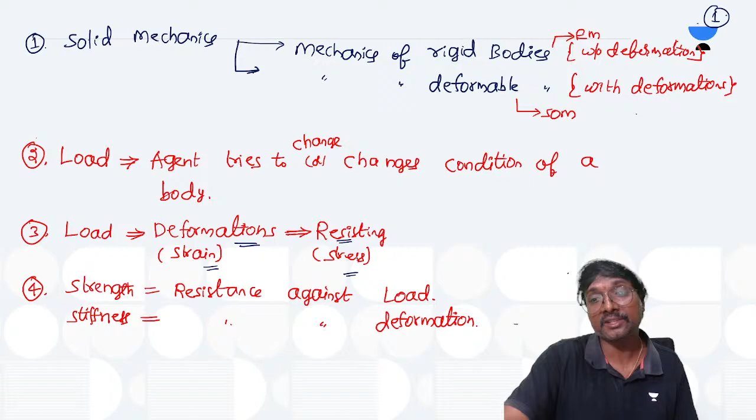So yesterday we have seen, if you just remember the previous class, what load will try to do. Load is an agent. Load will try to create the strains first, na? Based on the strains only, that member will try to offer resistance. Means strain will come first. Based on the strain that load is going to create, the member will try to develop the stress or this resistance. Who will come first? Tell me. Strain will come first, na? Stress is depending upon the strain trying to be generated. That is why strain is an independent quantity, stress is depending upon the strain.

So always independent quantities we have to draw on the x-axis, na? Dependent quantities we have to draw on the y-axis, you can say. Is it clear everyone, that point? Somebody respond. Is it clear everyone? I think, okay, nobody is there in the class, is it so?

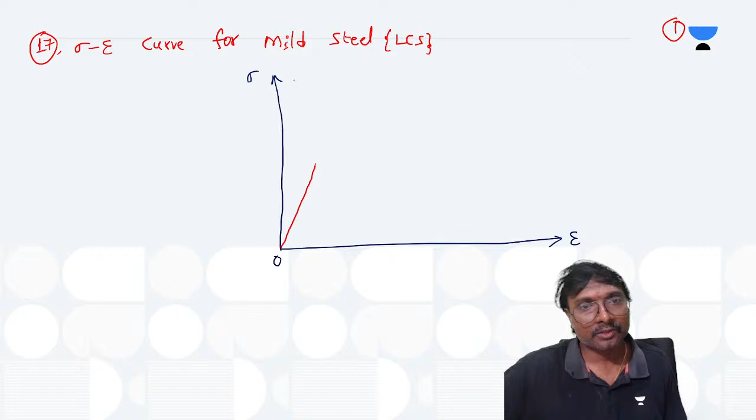So up to this point, we'll be having this straight line variation. After this you'll be having this curved variation, you can say. Then you will be having the curve in this manner, if you just observe. Yes, no?

This is what your curve is. So now what is this first one? Up to this it is a straight line only, right? This is your A point, you can say. That point A is representing which one? Proportionality limit, right?

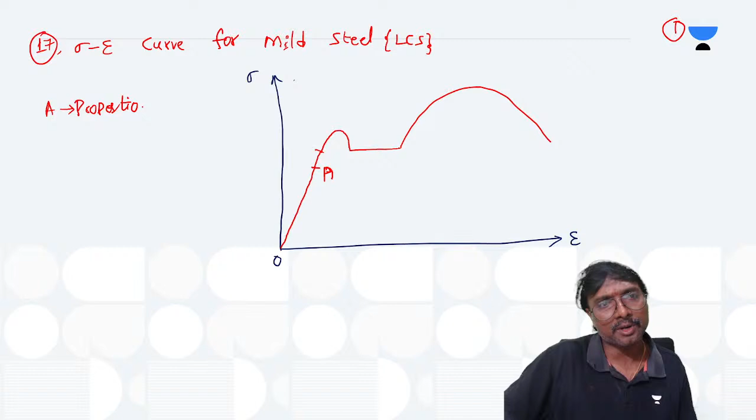So what is the meaning of this proportionality limit? Tell me all of you. What is the meaning of this proportionality limit? Proportionality limit means Hooke's law is valid up to this point only. What is Hooke's law? Anyone guess? Stress is directly proportional to strain, na? Now what is this B point, you can say?

Proportionality limit means, if you just observe, this portion will be which portion, you can say? That is your straight portion only, for this stress strain curve. But here what is that, you can say? A to B, it is your curved portion, na? A to B is a curved portion, you can say, if you just observe. That B will be taken as elastic limit. What is the meaning of this elastic limit, if you just remember all of it?

Elasticity we mentioned in the previous class. It is the stress or load up to which point the material regains its original shape and dimensions after removal of load. What is elasticity? It is a property by which it can regain the original shape and dimensions after removal of this load, up to the elastic limit only. After that, complete recovery is not possible; little permanent deformation occurs. That is what elastic limit means.

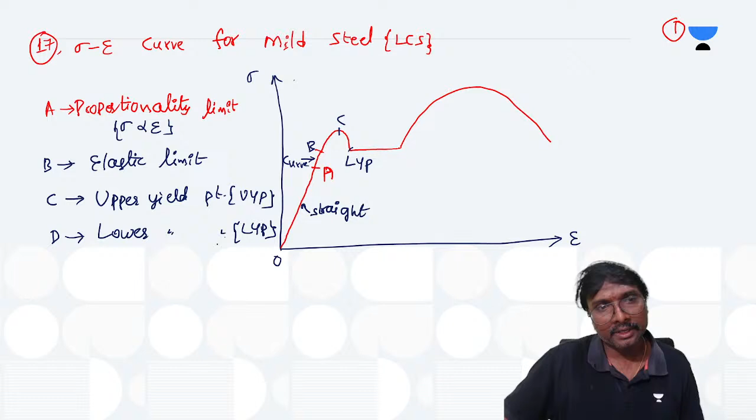Now this lower yield point itself will generally be taken as the yield stress for the material. Mostly, the upper yield point is not taken as the yield stress; only the lower yield point is taken as the yield stress.

Now this is your D point, and this is your E point. Tell me, what happens from D to E? Strain is increasing, but is there any resistance? Stress does not increase. There is no increase in stress or resistance, only the strain or deformation is increasing.

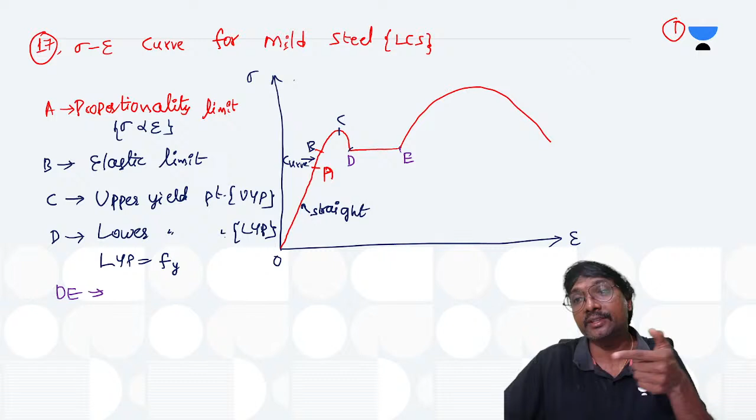It's like water - if you put your finger in water, it will start flowing. Even for zero force, if you pour water on the floor, it will start moving on its own without applying any force. Like that, plastic means even without any resistance or loading, the deformation or strain will be higher.

That is your plastic zone. During this, it will not offer any resistance because its capacity got exhausted.

Now from E to F, what happens? Again it will start regaining its strength by means of rearrangement of particles. That EF portion is nothing but your strain hardening zone, taken as the strain hardening zone.

Yes, strain hardening zone means during the plastic condition, rearrangement of particles is taking place. Once the rearrangement of particles is over, it will start gaining a little strength again, which is why the stress-strain curve starts rising again.

Now what is that F point? If you observe, F point is your ultimate stress point. Ultimate stress point means Fu is the symbol we give. Fy is yield strength and Fu is ultimate strength of a metal, as written in our steel structures or anywhere else. So Fu and Fy are given like this here.

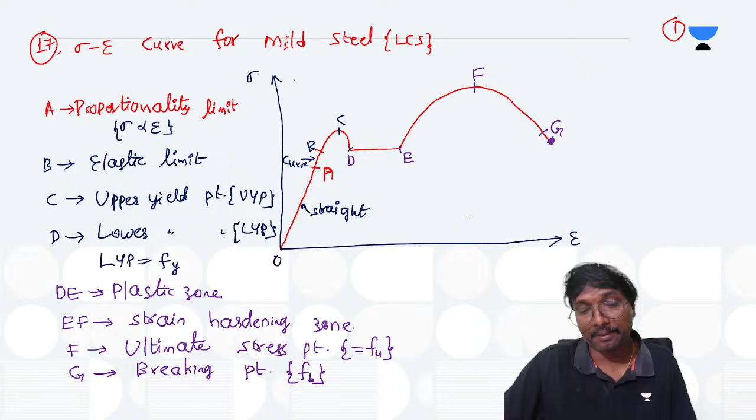Now this is another point, the G point. If you observe, that is your breaking point. Breaking point means breaking stress - at this place, breaking of this specimen will occur.

Okay, clear everyone? So this is your stress-strain curve for mild steel.

Now for this 18th point, what else can we consider here? If you observe, how does it change from first to last? Let's say your specimen is like this. At which point can you say your specimen looks like this, at point A?

Breaking point means where the cup and cone will happen, right Shruti? FB is the symbol we use for breaking point - F suffix B. Ultimate stress is F suffix U, yield stress is F suffix Y, breaking is F suffix B. The first letter of that term gives us the suffix.

Okay, now originally it is like this - this is what you're having. Now by the time it comes to B, D, E, what happens? When you increase the load slowly, the deformation increases, length increases, and what happens? The length increases and the cross section decreases.

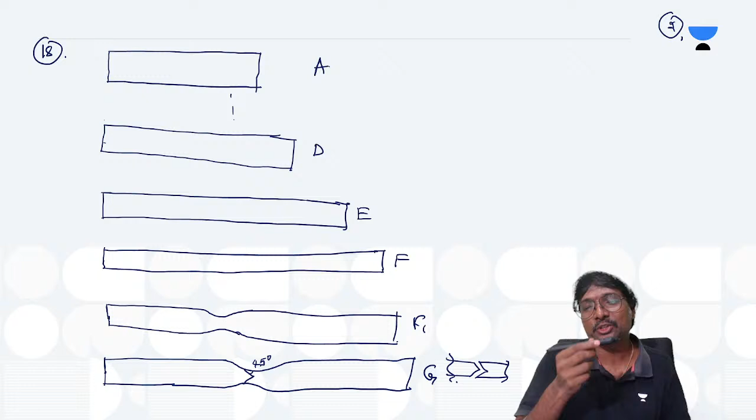Yeah, no problem, right? What is the problem now? Previously, I had drawn this diagram - a very big diagram.

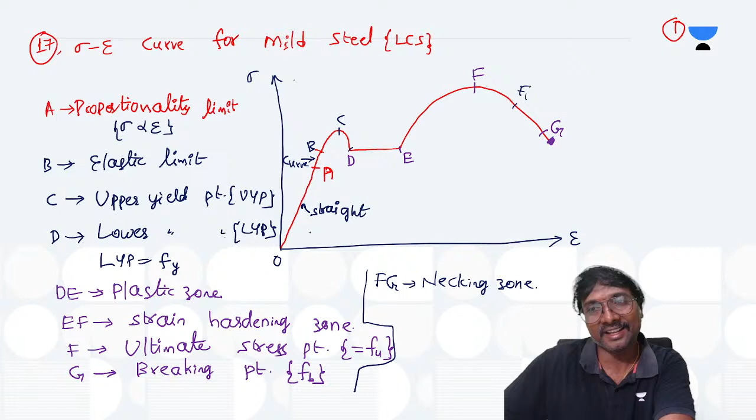I have drawn the stress strain curve with specimens shown vertically, because if I draw it horizontally here, space may not be sufficient. That is why I have shown it vertically. But in the next slide I have drawn it horizontally because more space is available. You can draw it in any manner, it does not matter, only the essence you have to understand.

So will anybody say they will not give marks if you draw it horizontal? No, no. Whether you are drawing horizontally or vertically does not matter, it is the same representation only. We are representing the same thing, that is only important.

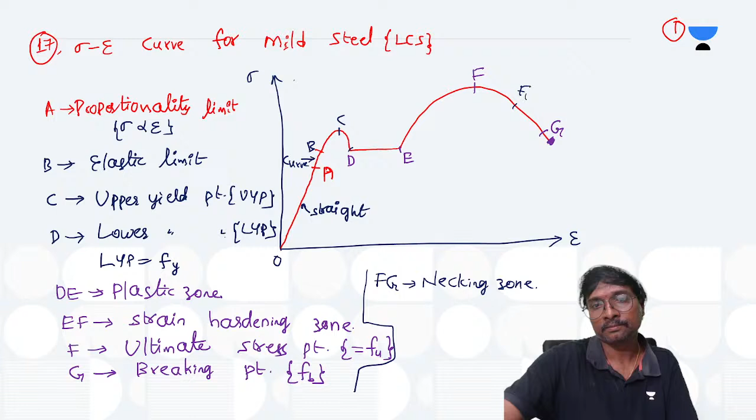Now, what is that gauge length we have to select? Tell me. If you just observe, gauge length GL is equal to L naught, equal to how much? Okay, I'll wait. Note this and tell me.

Note this and tell me, then we'll write that gauge length formula and close. Next class we'll discuss other things in detail. That true stress strain we'll also discuss in the next class only.

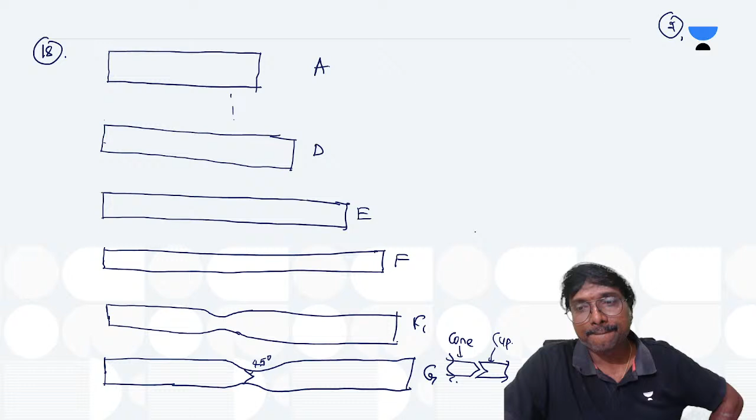Okay, done? Gauge length, right? What is that gauge length? Tell me. It is the length over which we are measuring the deformations.

Whenever these universal testing machine jaws are there, we will be keeping the specimen here. We will not be measuring from starting to ending. Over this central portion only we will be keeping a dial gauge for measuring the deformations. This distance is called with which name?

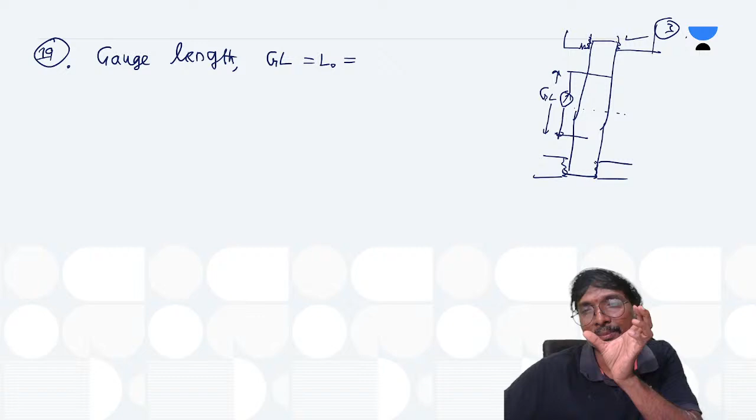You can say gauge length, right? Why don't we take the entire length? Because these end portions are affected by the load mainly, affected by the machine holding, this machine influence is there. So that's why we go for the central portion which is not affected by the machine.

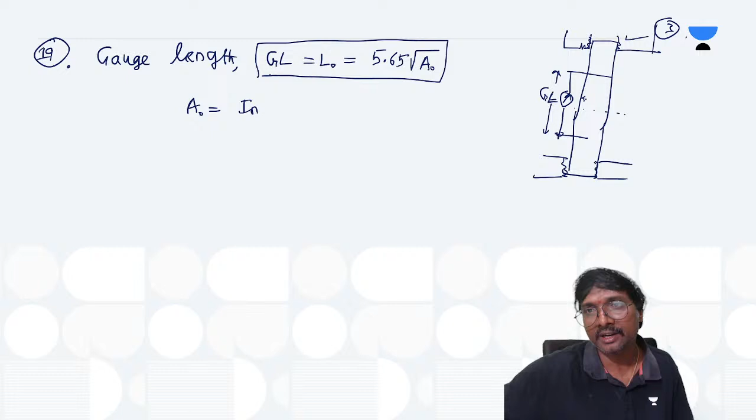So that gauge length, how can you take that? It is 5.65 into root A0. What is that A0? A0 is nothing but the initial cross section area of this specimen before conducting the test.

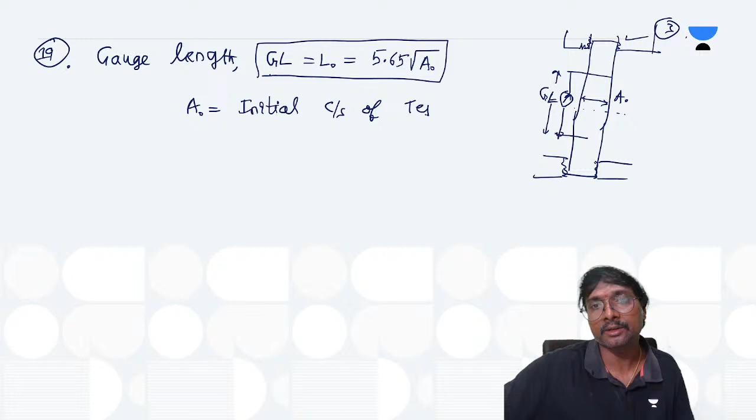Initial cross section of this test specimen, you can say. Initial cross section of this test specimen will be having, if you just observe, like that. Is it clear? Yes, is it clear now?